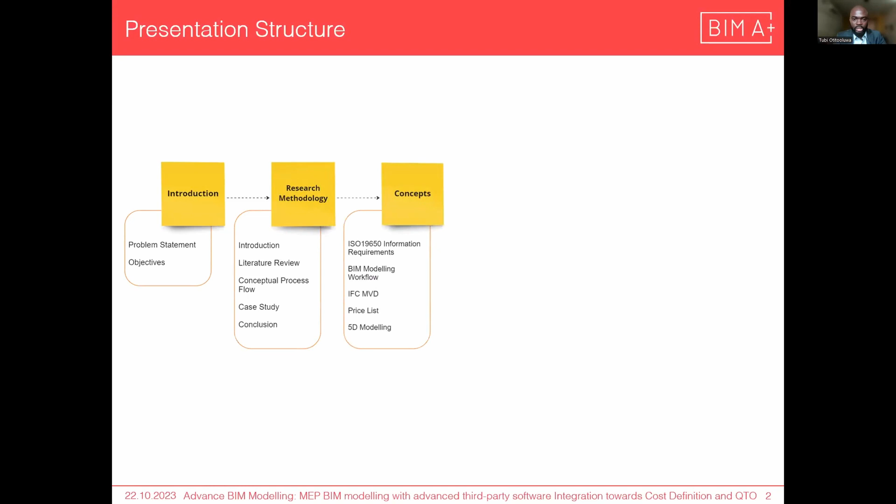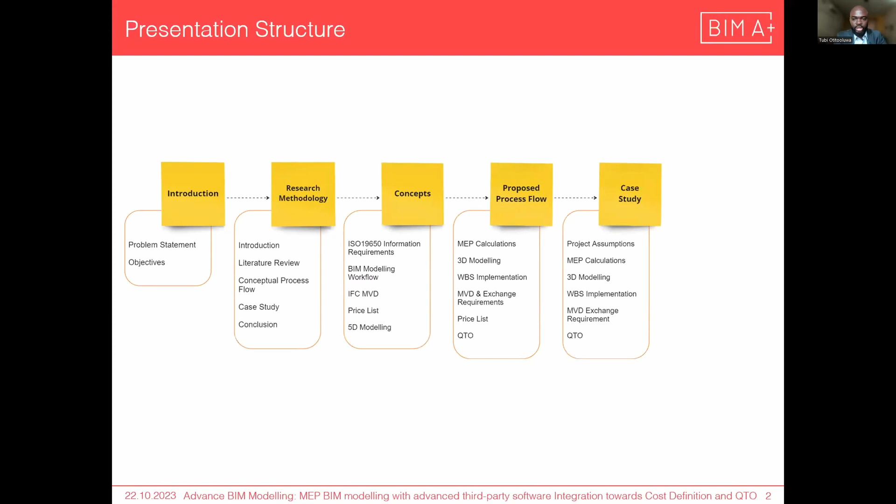So first of all, we're going to go through the presentation structure. We are going to present about the problem statement and the goals. We'd also talk about some key concepts that we realized, I think it's worth sharing, and also go on to talk about the proposed process flow for this project, and then go through the case study itself, and end up with our conclusions.

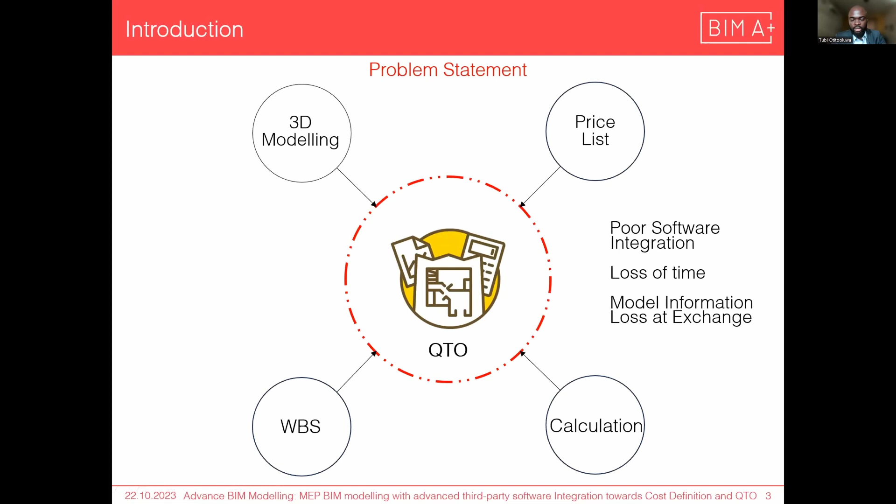So the problem statement, there's been a lot of advancements when it comes to the use of BIM in the built industry, and this has also impacted on how we generate our quantity takeoffs. However, the proliferation of BIM has also created some form of fracture, and that has resulted in poor software integration, loss of time, and also loss of information during exchanges.

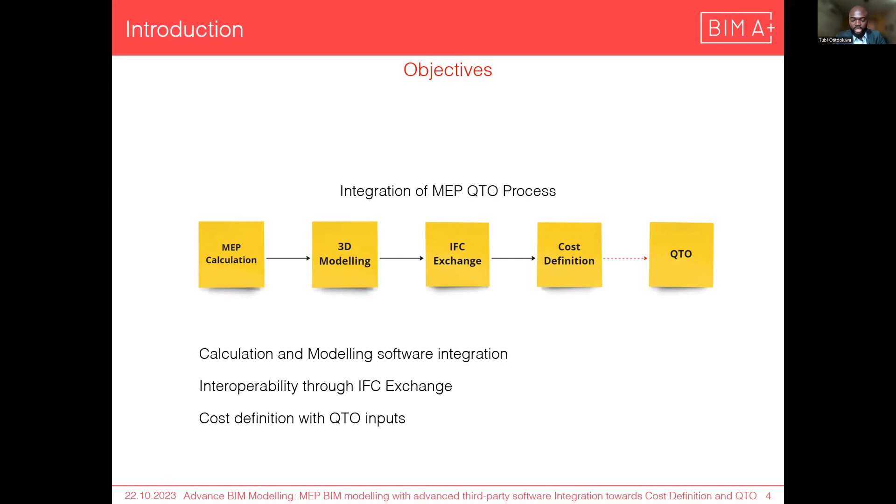The aim of the thesis is to develop an integrated MEP quantity takeoff process that addresses these concerns by integrating the software platforms for calculation and modeling, and also creating interoperability between information modeling and quantity takeoff platforms through IFC Exchange. And then finally, bringing all this together with the price list information and WBS cost definition on the QTO platform.

So we're going to talk briefly about the concept of information requirement under ISO 19650, which is the international standard for managing information over the built asset lifecycle. When an organization identifies a strategic need for a built asset to meet their organizational goals, this need is documented and is also referred to as the organizational level information requirement.

The expression of this organizational level requirement oftentimes leads to asset and project level information requirement, while asset level information requirement is triggered by events during the asset operation. Project level information requirement is usually triggered at key decision process points during the project execution itself.

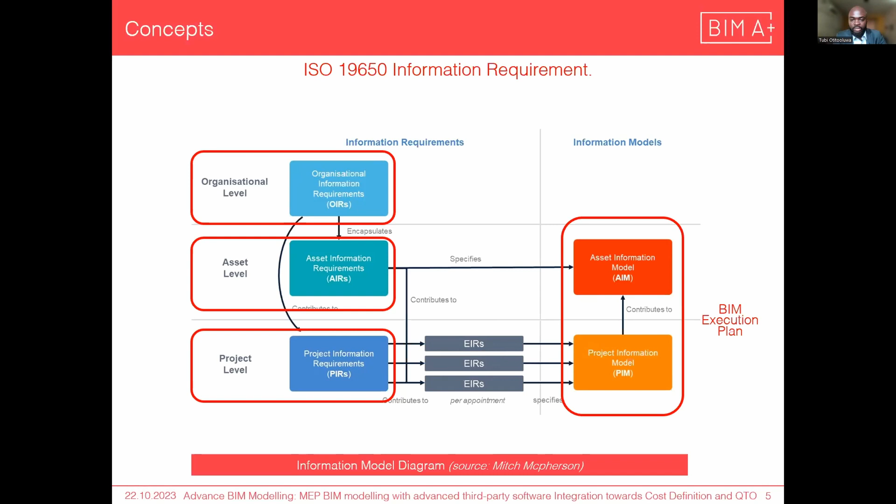Both AIR, which is asset information requirement, and PIR inform a set of managerial, commercial, and technical project information, which is known as exchange information requirements, which is here and is usually prepared for each appointed party. In response to this, we usually have the appointed party prepare documents that is referred to as the BIM execution plan, outlining how the project information model and asset information model is going to be delivered in alignment with the employer's information exchange requirements.

About the typical workflow, this represents the typical workflow that leads us to quantity takeoff, as summarized by major work stage standards. We usually would have it start with the preliminary calculation and spatial programming, beginning each of the process, and then at the end of each stage, it ends with coordination, clash detection, and resolution. And then the next one basically improves on the previous stage until we get to the point of quantity takeoff, which ends the process.

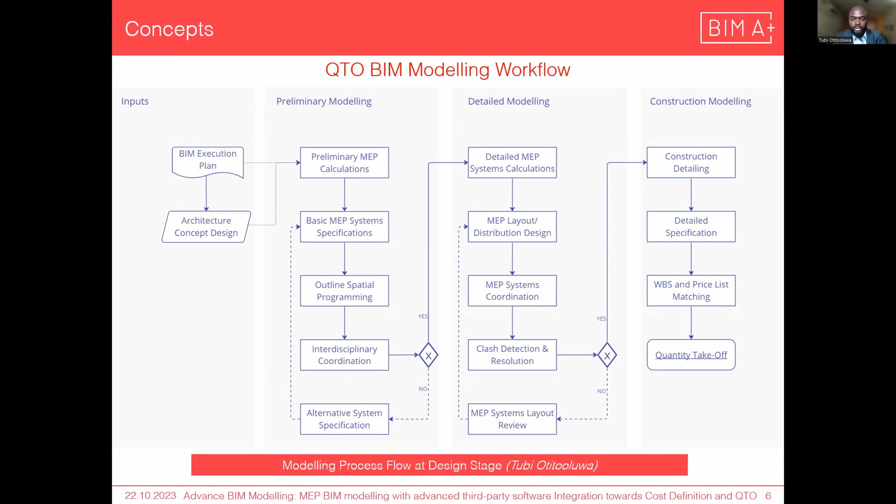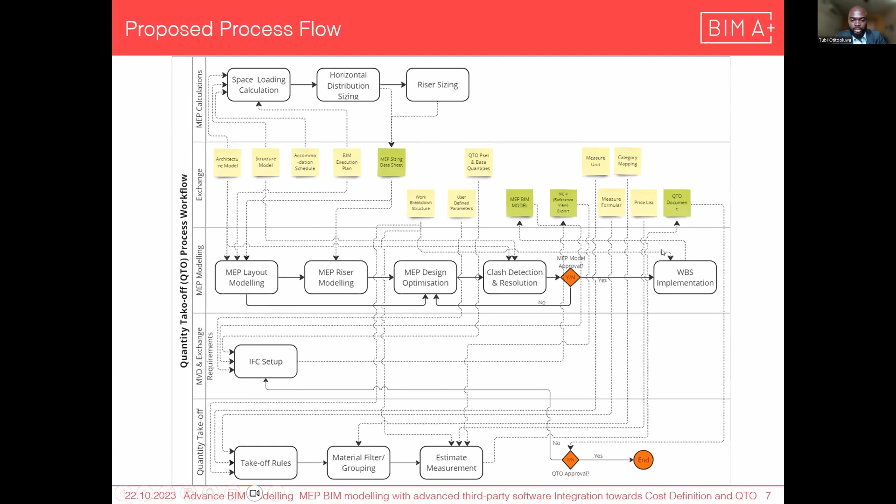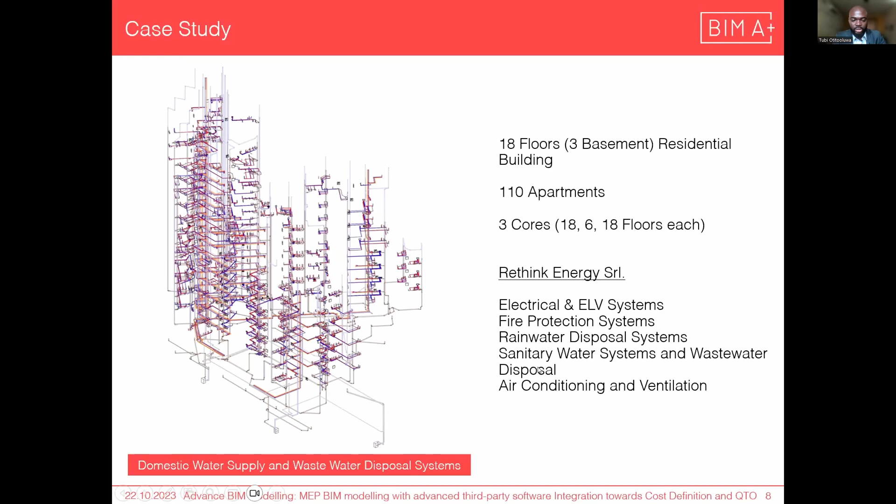The case study we worked on is a project that is set in Milan. It's an 18-floor residential building, 110 apartments. It has three cores, each one 18, 6, and 18 floors. Rethink Energy was the appointed party for the services, but for the purpose of this presentation, we're going to focus on sanitary water system and wastewater disposal, because the process can be adapted to the other systems that they've been appointed to supply.

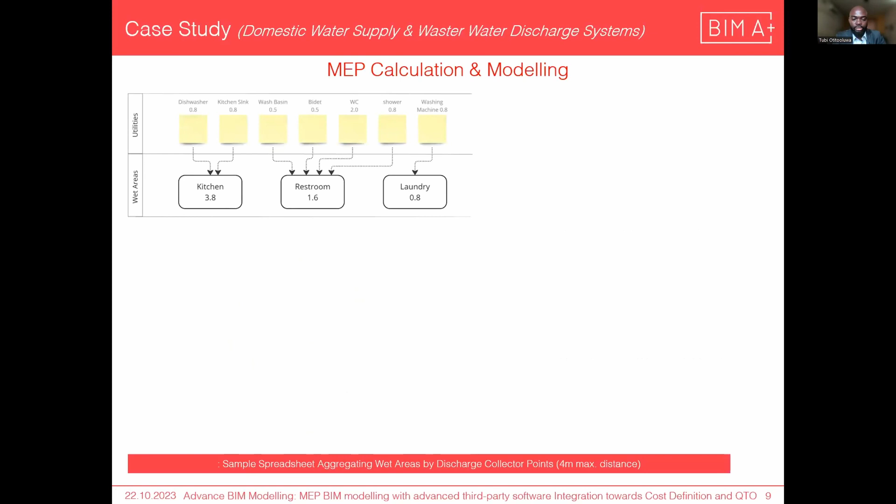MEP calculation and modeling happened simultaneously; the model was done in Revit and calculation was done using spreadsheets. For wastewater disposal, which is this calculation, the system starts with identifying the unit of discharge for each utility within a wet area. And once we are able to calculate the total unit of discharge for each wet area, using the rule of thumb of 4-meter radius, we're able to establish and locate discharge points within the layout of the floor plan.

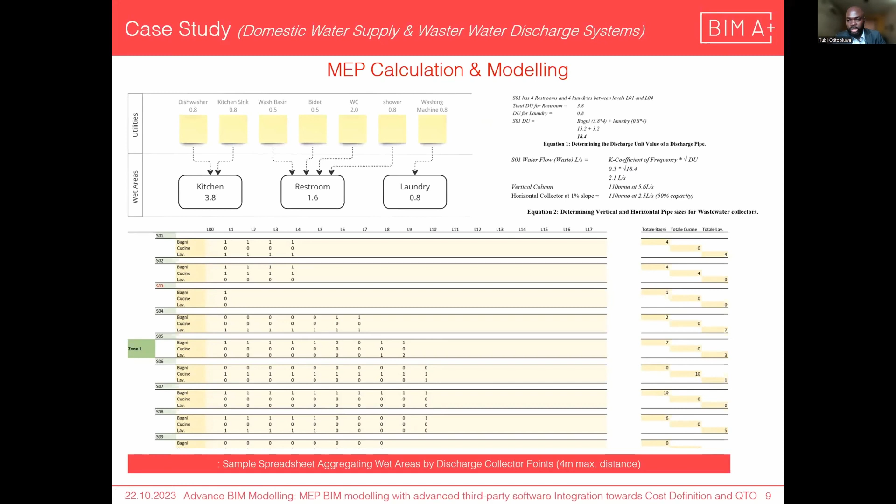And this table shows a list of the discharge points that we have identified. When we add up all of the connected wet areas for each of the discharge units, we're able to find out the discharge unit for the discharge point. And then, combining that with the coefficient of frequency, we are able to find out what the flow rate for that pipe is, and then use the corresponding pipe size. Same thing applies with just a little bit of tweak when it's vertical. When it's horizontal, we use 1% slope.

For the domestic water supply, it's the same principle, except this time it's unit of charge. And this example provides for water supply to an apartment on the first floor. And using a calculation, we can identify what the flow rate of the pipe is. And then we can use that to define what the pipe diameter is, and then use the next standard size pipe for that particular water supply into the building, into the apartment.

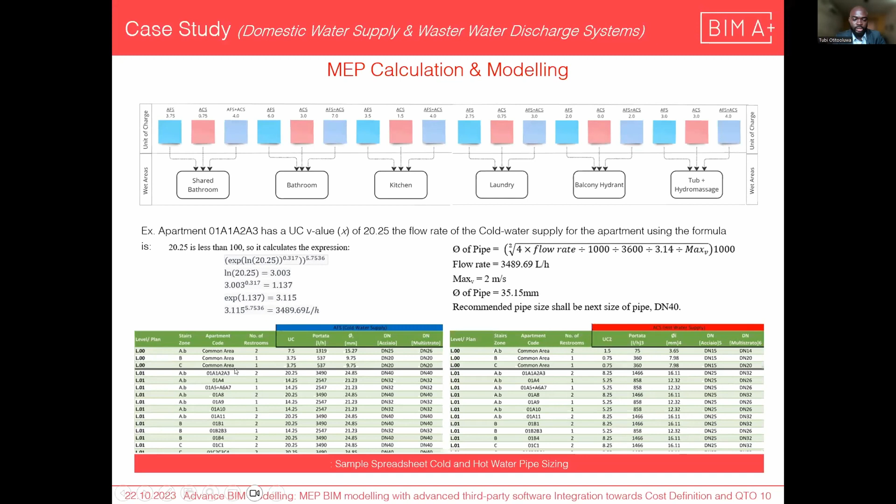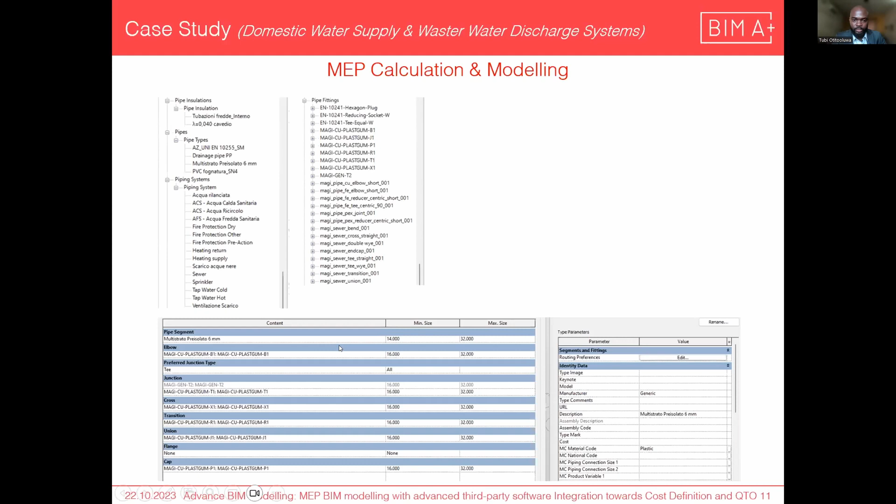For the modeling, Revit was used, like I said before, and we used Revit families, except that it was cleaned up, and then we used the sizes and the fittings that are required for the project as specified by the BIM execution plan, and also some certification, and also using codes and compliance and local compliances required by the law of the place that the building is situated.

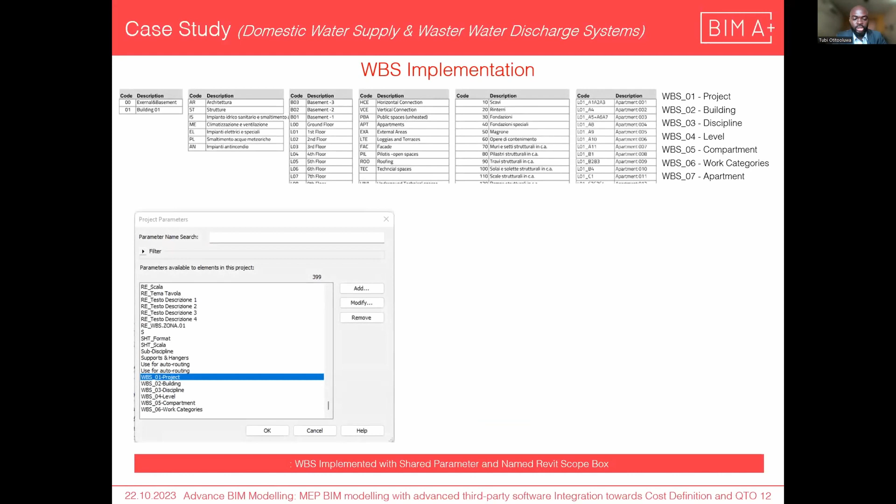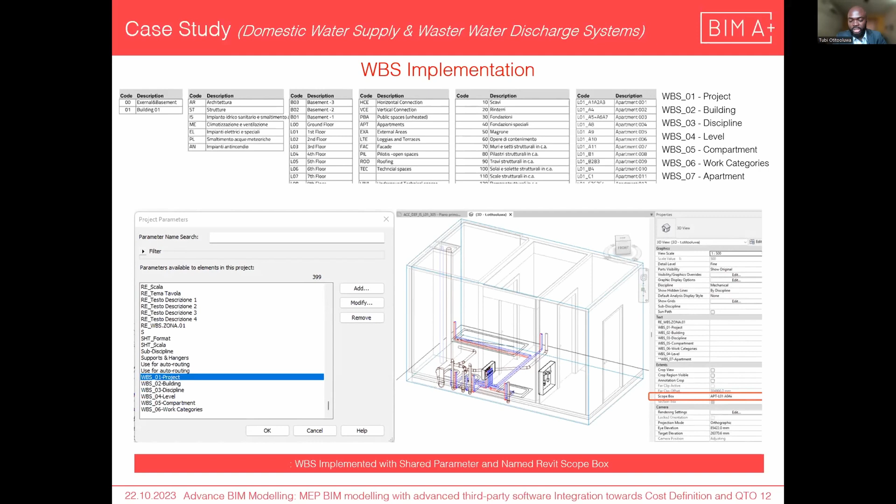For WBS implementation, we had 7 levels of WBS, which gives the opportunity to categorize the quantities based on those different categories. And then to implement this in the model, we created a shared parameter with the WBS name, which we applied to specified objects. Using named scope boxes in Revit, we're able to isolate objects by space and assign the WBS parameter to the objects within that space.

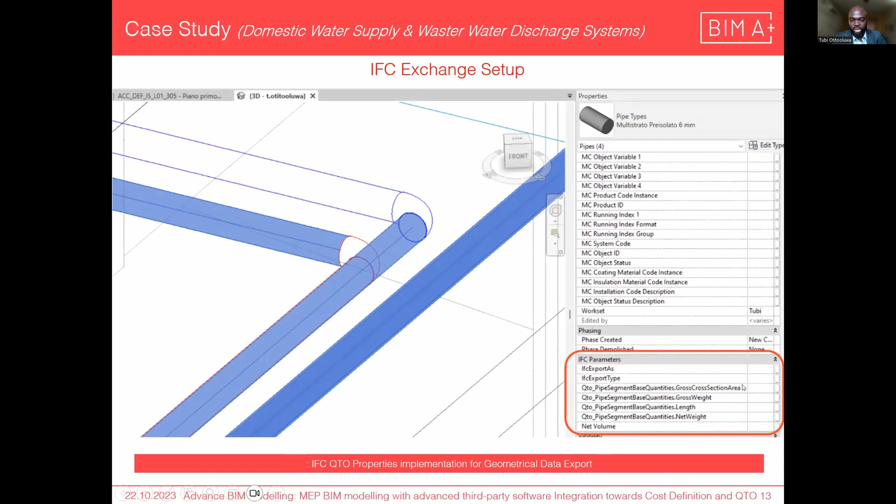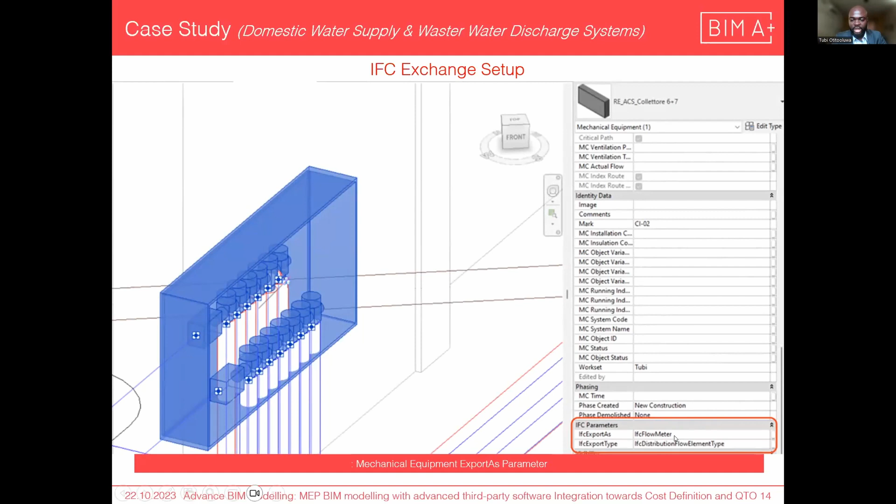For IFC exchange, we used QTO property sets that were used to extract geometrical data from the model. So we can see here things like gross cross-sectional areas, gross weight, length, net weight, and things like that. We also, for mechanical equipment, just to be sure that the objects are mapped appropriately, used IFC export as to specify where we want the objects to be mapped into.

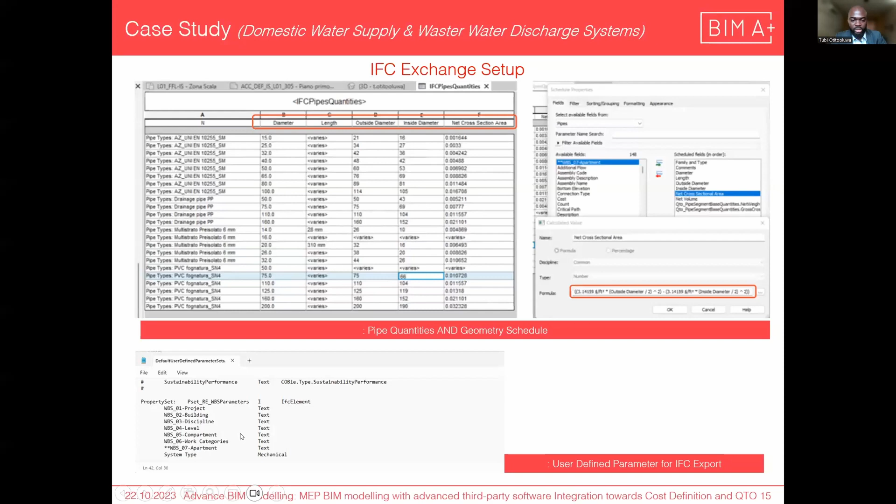And also for verification purposes, geometrical quantities were extracted through Revit schedules and were assigned as user-defined parameters while we were exporting. So this is what the parameters look like for the WBS as well. And then in exporting, we used IFC4 Reference View because it was preferred, since it has the most improved geometrical representation properties compared to IFC 2x3.

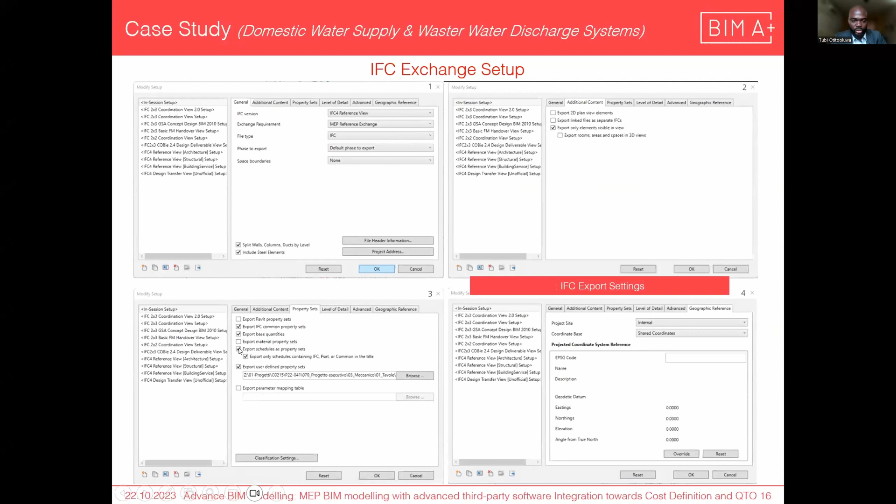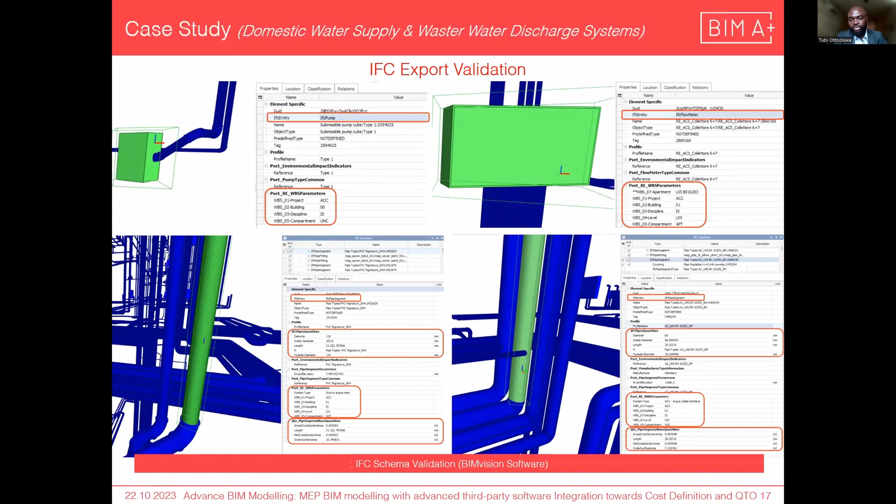Also, the schedules were exported as seen here, and when the export was done, we did a validation with a few IFC viewers to confirm that the properties we exported are indeed what is in the file, so that when we get onto the QTO software, we have what we want. And the first thing that was noticed was that calculated values from the schedule were not exported. And with a few tries, everything was fine and good to go.

For quantity takeoff, the process is such that we had a price list filter for the database. The price list that was used is the private price list that was gathered from the personal experience of the organization working with different contractors. So we used a filter from Revit using the unique categories, unique object types in Revit to do a filter of the price list. We got that into the project price list.

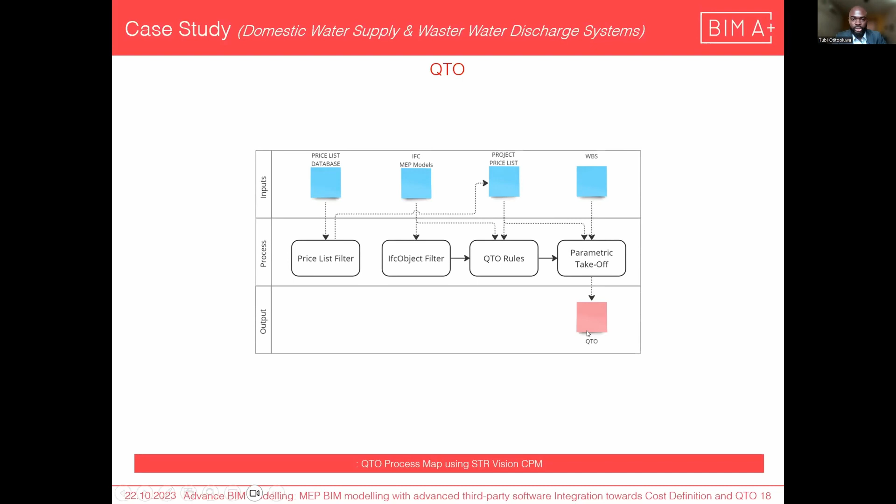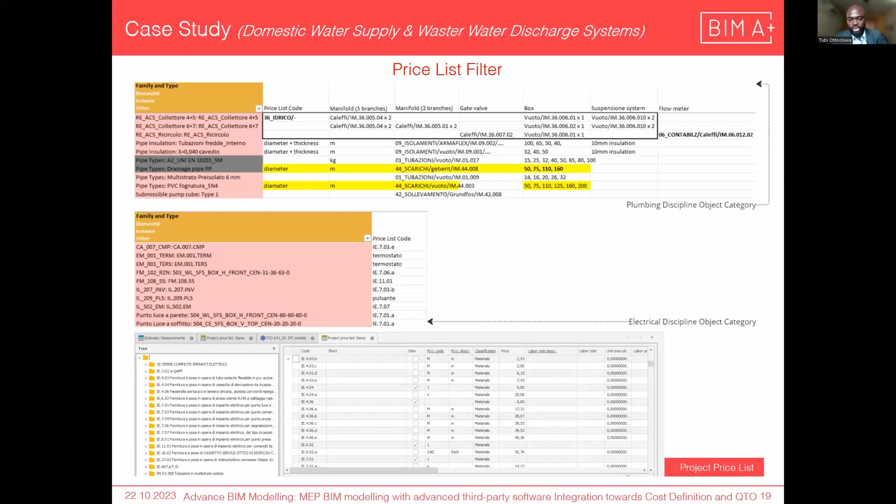We did the same thing using filters for the IFC object, and then applied the quantity takeoff rule using a unit of measurement, and then including WBS, we ended up with the QTO that we wanted. So the process looks like this in detail. This is a sample of the list of objects that we exported from Revit, and these are the codes for the price list. And this is what it looks like when they were imported into the QTO software. For this purpose, the QTO software that was used was STR Vision. And when it comes to the filter, this is what the filter looks like.

Sorry to interrupt you. We are running out of time. If you can make it faster to the conclusion, I'd appreciate it.

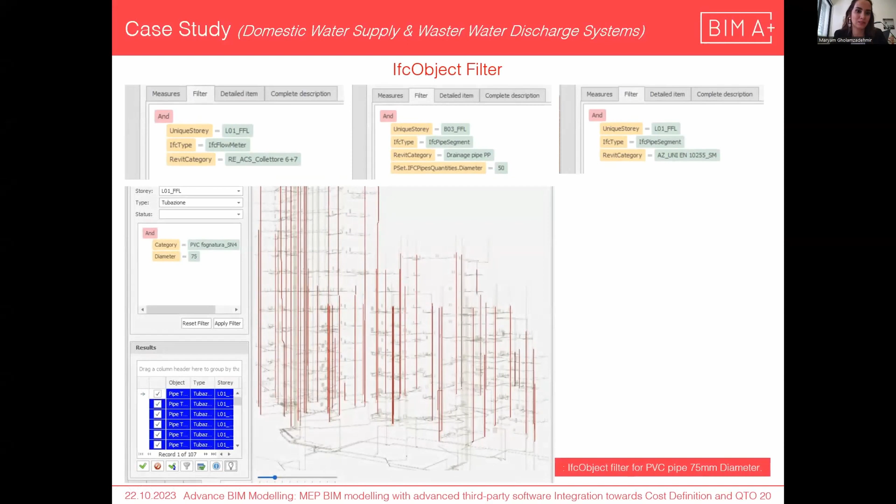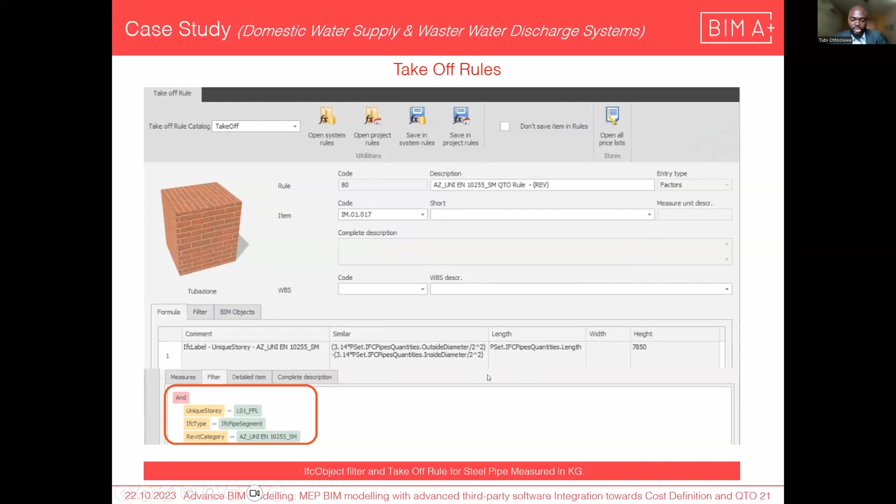Thank you. Okay. Yes. So the export was done this way, and for the takeoff rule, using the code from the price list, we were able to do a calculation, for example, for this one, steel pipe, which is required to be measured in kilograms, to find what the quantity would be in kilograms. WBS was applied to the QTO, and we ended up with the quantity takeoff.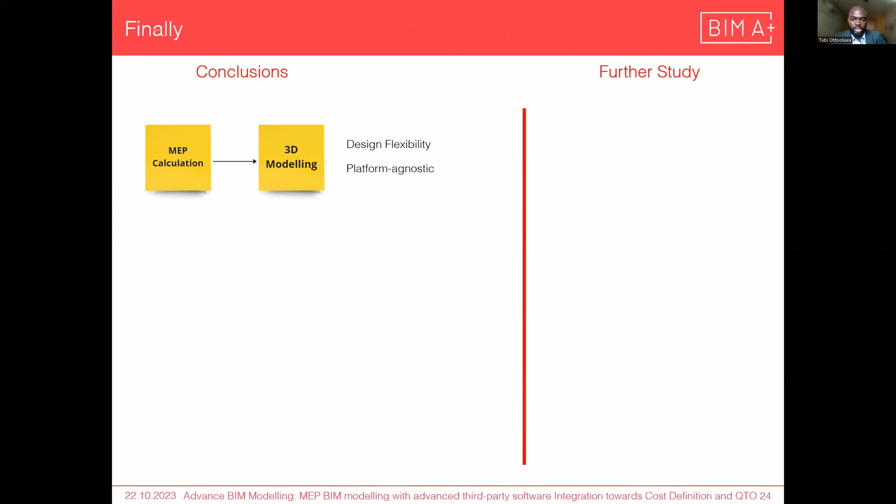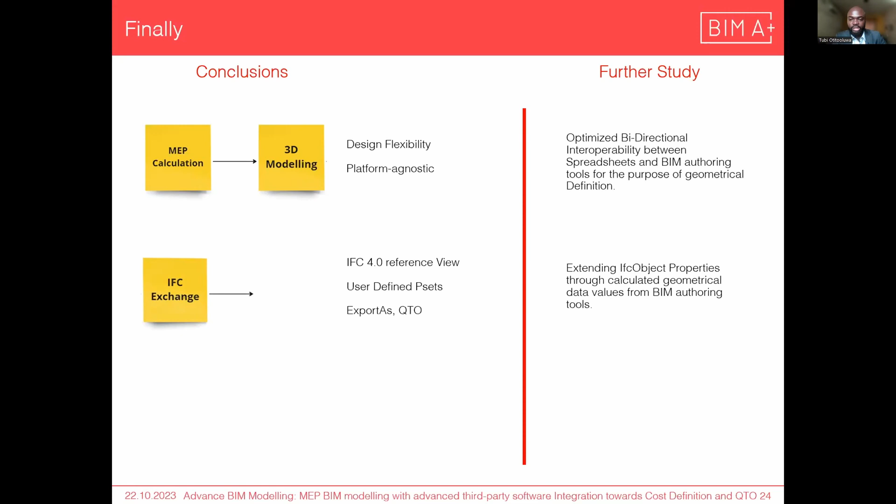So in conclusion, we went through integrating the calculation and software. The advantage of using the spreadsheet and Revit was the platform-agnostic solution that the spreadsheet gives us. But the problem we encountered was that sometimes bi-directional interoperability was a bit difficult, and I think that's something that can be looked further into. For the IFC exchange, we used IFC4 and user-defined property sets. Like I said earlier on, the calculations didn't come in, so I think exploring further how we can expand the geometrical data values in IFC will be very, very useful.

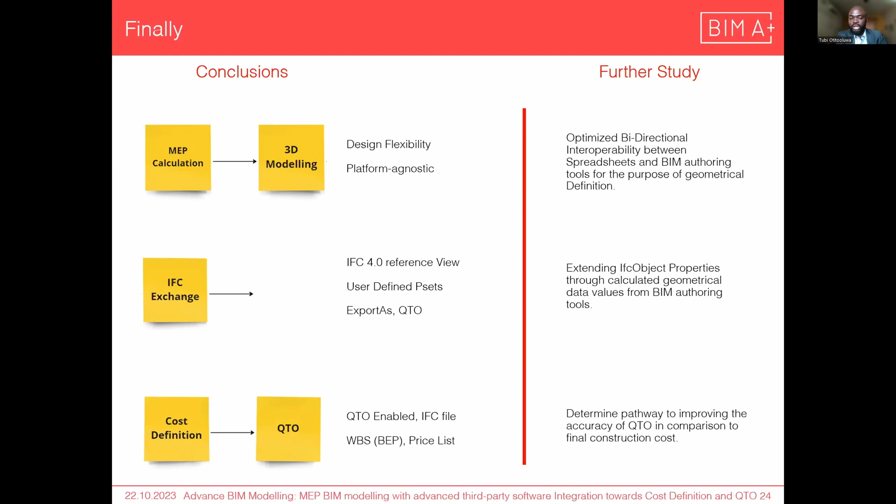Finally, for the QTO, for further studies, I think that even though we've done this, oftentimes there's always the concern that it's not close enough to what the real cost of the project ends up being. So I think research into how you can have the project QTO come closer to the final cost of the project will be a very useful and valuable one.